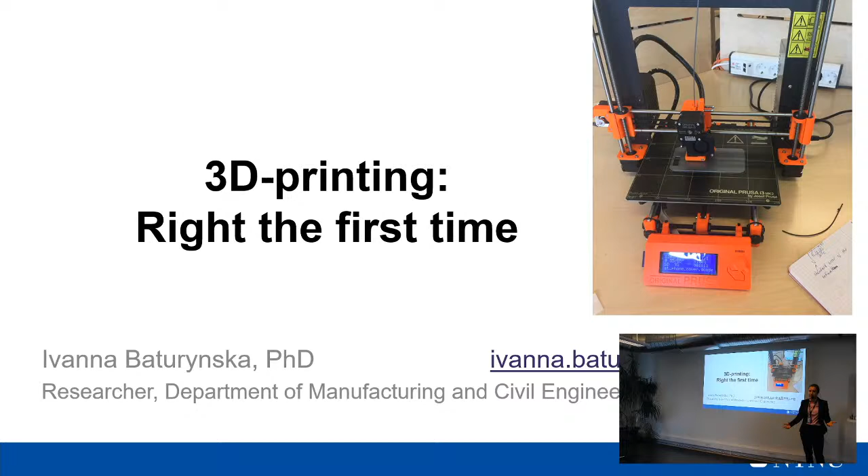I want to add a bit more on my background. I actually come from Ukraine. I moved to Norway 7 years ago to start my master's study in sustainable manufacturing, and after that I went for a PhD at the same department and continued working there. In Ukraine, I also finished my master's in computer integrated manufacturing, and I have my bachelor's in automation and computer integrated technologies. So all this mix comes together in the solutions that I'm developing.

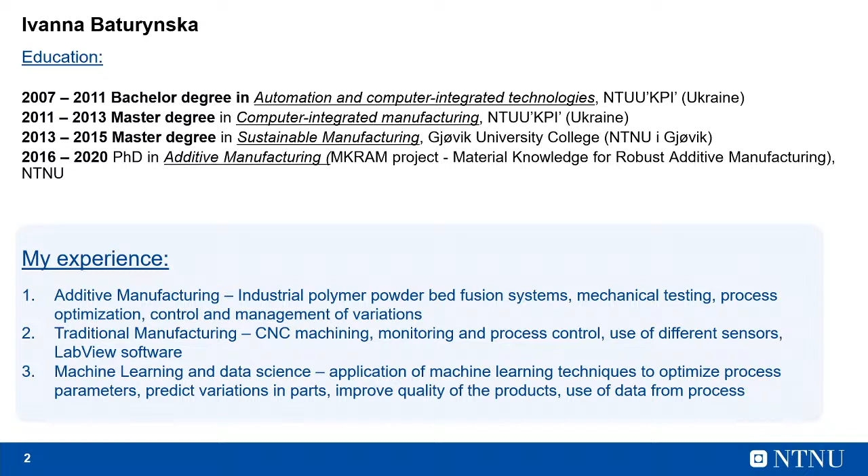So I work not only on additive manufacturing, but I'm also interested in traditional manufacturing, and my focus is on data analysis, machine learning, and similar topics.

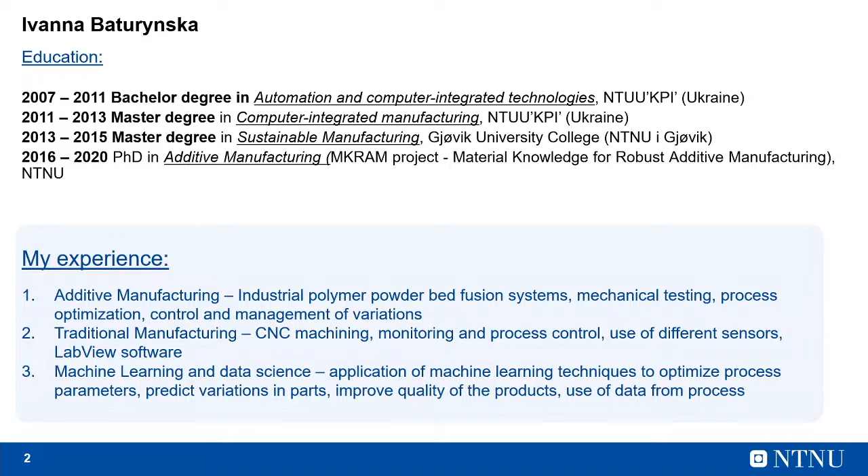But today we will look at a bit of a different side. Today we will talk about what 3D printing is in simple words. How do we define quality? Because you will see that every single person can have their own opinion on what is good quality and what is bad quality. Which factors affect the quality of 3D printed parts? And are there any design rules? Should we follow some rules to get good parts?

I will also show you some examples of the printing settings, how we can manipulate them and how they will affect your result. And then we'll move slowly to industrial additive manufacturing, and show you the difference between desktop 3D printers and industrial machines. I will also tell you a bit more on the current research, so what we do in our department and our laboratories in Gjøvik.

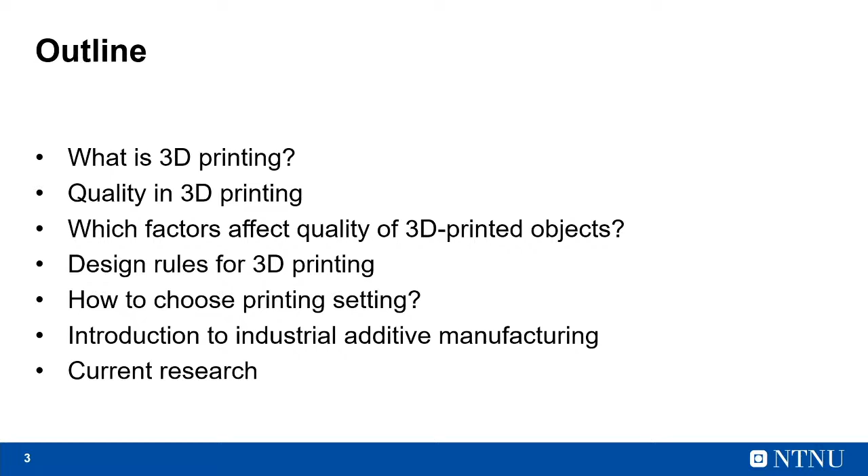So what is 3D printing? 3D printing is a technology that allows us to produce 3D objects by joining material layer by layer. And to do that, we need to have a 3D CAD model available to produce the parts.

So now you can see a small video of how a desktop 3D printer actually works - we have more than 60 of them in our lab. And then in the picture you can see how, using this technology, we printed a soft toy of a pug, a mops, in different dimensions and different colors. So this is fun stuff.

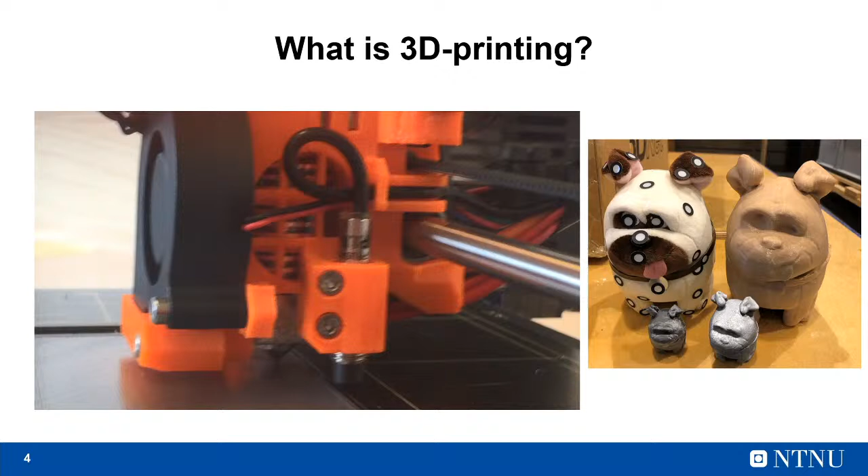But actually, what are the main components of 3D printing and additive manufacturing in general? In general, we can say that we have three main components. The first one is the CAD model that we design.

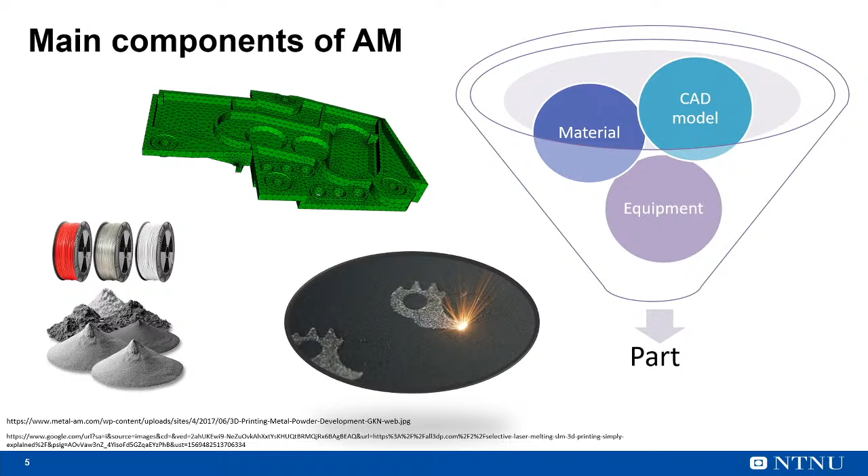The second factor is material, depending on the technology we use. The third is equipment, the machine itself, everything that brings energy to melt the material. It's very important to understand these three different parts, because each contributes positive and negative effects on the production of the parts. We also need to know their synergy, how to control and change some of them, and I will show you later about that.

If we talk about CAD, especially those who know how to draw on paper, maybe at least once in your life you've drawn on paper. But when we talk about the CAD model that we use for 3D printing, it's not 2D like you draw on paper, it's a 3D image.

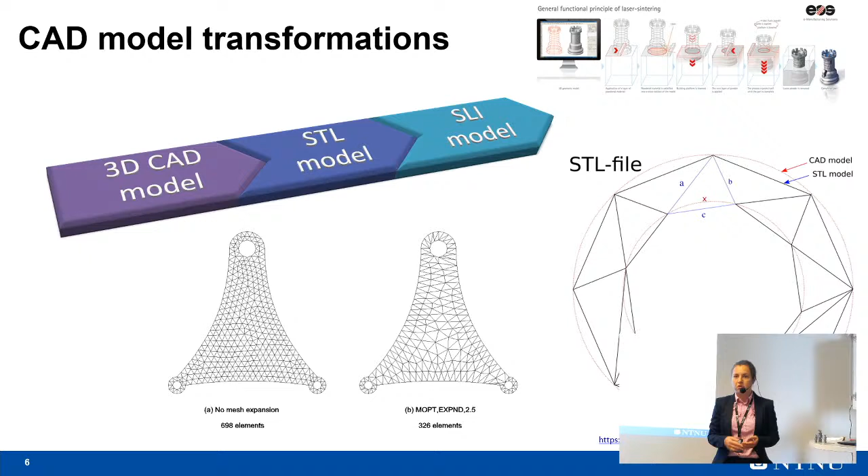Typically for those we use special drawing software, which can be SolidWorks, Autodesk, and so on, depending on the country and accessibility.

But in reality, we don't just take a 3D CAD model and print it right away. We do some manipulations. First, we save it in a special format, which is an STL file. The STL file transforms the 3D model from a solid 3D shape to a 3D surface-based shape, so then we have triangles, as you can see on the picture, that help us describe this surface.

These triangles allow us to slice the object. So if, for example, we have an object, in order to print it as it is, we need to slice it into 2D slices, and then each slice is printed out one by one. This is what you saw in the first video.

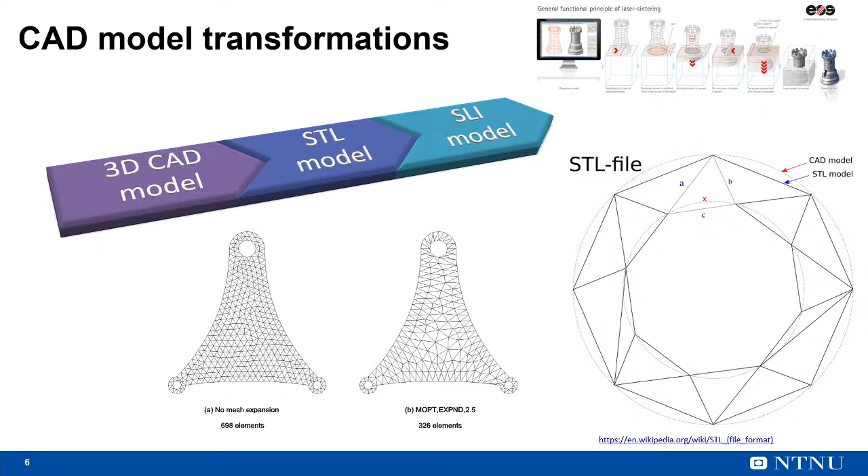But then the question is, okay, we understand that we have a process, we have material, and so on, a lot of choice. But what is quality? Before talking about how to set parameters or how to evaluate and improve them, we need to define quality. What is quality to you?

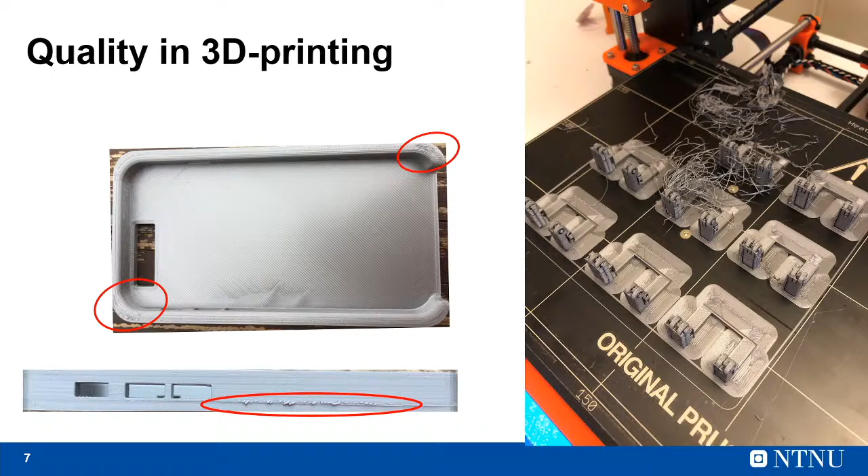Or maybe if we talk about a printed object - I don't know if it's good on the screen, but you can see here the surface is not as good. Is that bad quality? What do we call bad quality? What is the definition?

For us humans, the definition of bad quality in daily life could be that it doesn't look nice, it doesn't function as it's supposed to. But in industry, we have a much more complicated definition of quality. There, quite often, we focus on the dimensions, and small deviations are extremely important. But in everyday life, who cares if you print a minion and it's a bit smaller or larger? No one cares.

You want it to look nice, right? So then you will focus on a bit different settings, and you will have a bit different problem to solve.

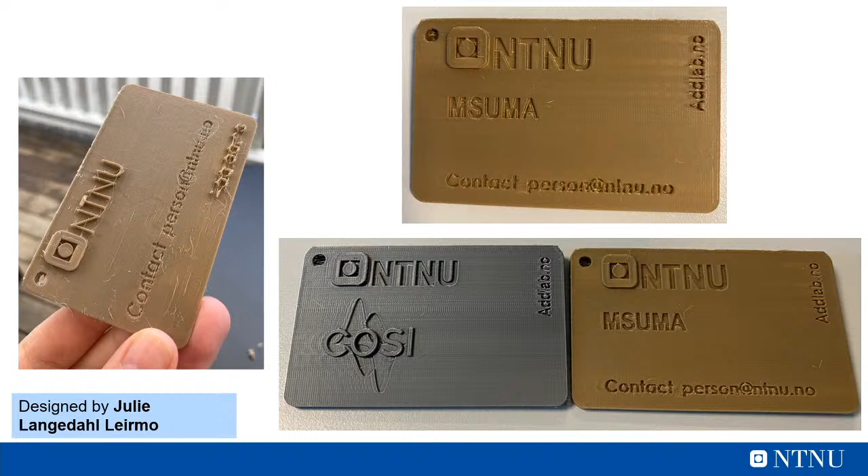So when we talk about quality, I will tell you slightly what can affect it. We can think about rain - yesterday it was a rainy day in Gjøvik. Does it affect if I set a print on a rainy day? Is it going to affect my quality? Or is it okay if it's outdoors, it's raining, and I just set the print? Or maybe should we choose a sunny day to do that? Have you thought of that?

I can tell you for sure, in research we already observed, and in practice we observed, that on rainy days we actually have much worse quality than on sunny days, especially regarding the surface. When you have these stripes of material, white ones coming out of the surface, we quite often get many of them when it's raining outside - even though we do printing inside the house or inside the lab, we still have these issues.

And then when it's a sunny day, we use the same CAD model, the same printing settings, the same printer that stays in the same room, but the surface is perfect. So it means that it actually affects the result. We need to take care of that, right?

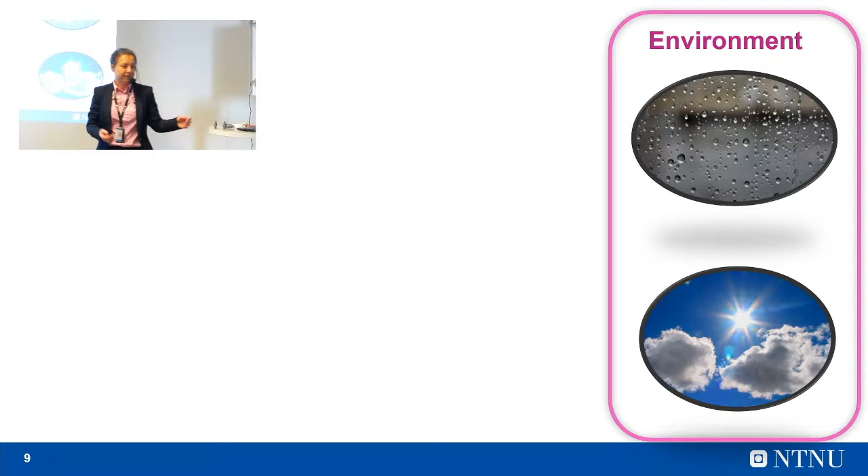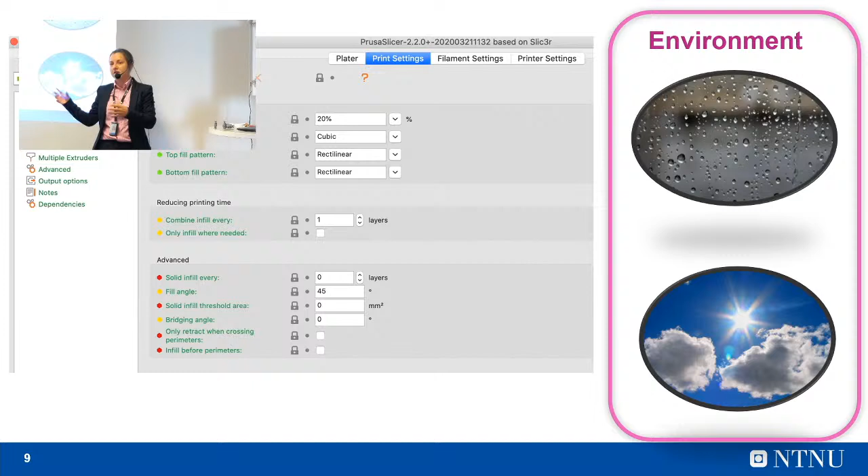But is that the only thing that affects quality? Most probably no. As I said, the way we set our printer, the parameters we choose, in combination with the CAD model and material, can also lead to many problems, issues, and bad quality in the result.

In some cases it can just burn the material, and you'll have a lot of burnt pieces on the object, just because you used a temperature that was too high. That's all. If the printer bed is too cold, most probably you will never finish the print because it will just curl up, not stay fixed on the printer, and on some moves it will just continue going and following the printer head, like dancing on the table. So you can turn on the music and just have it there. You don't want that, right? So you need to be aware of this.

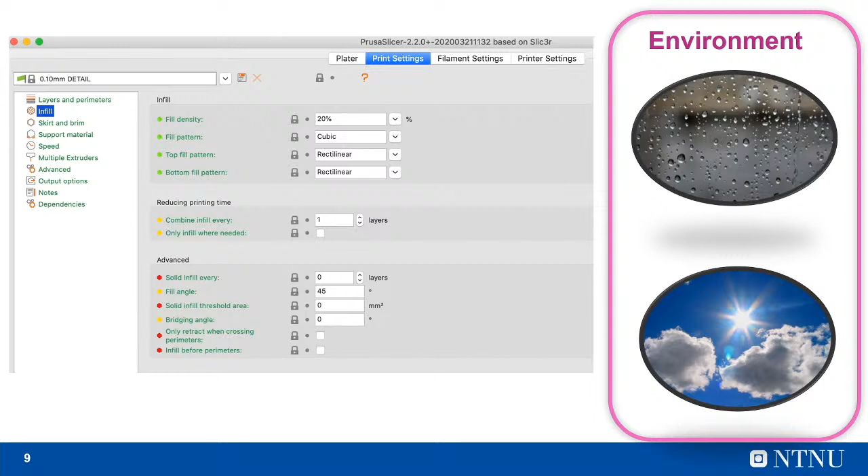Material choice - yes, which material? Who produced the material? Is the material inside this roll a good one? Or maybe there are some empty spaces that will lead to empty spaces in your part. Can you check it? Most probably no, but industry will check it, so they try to make sure they use correct material.

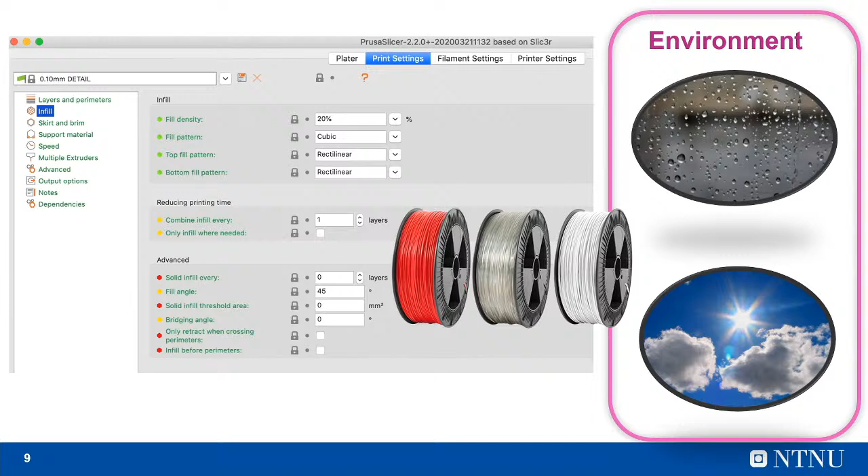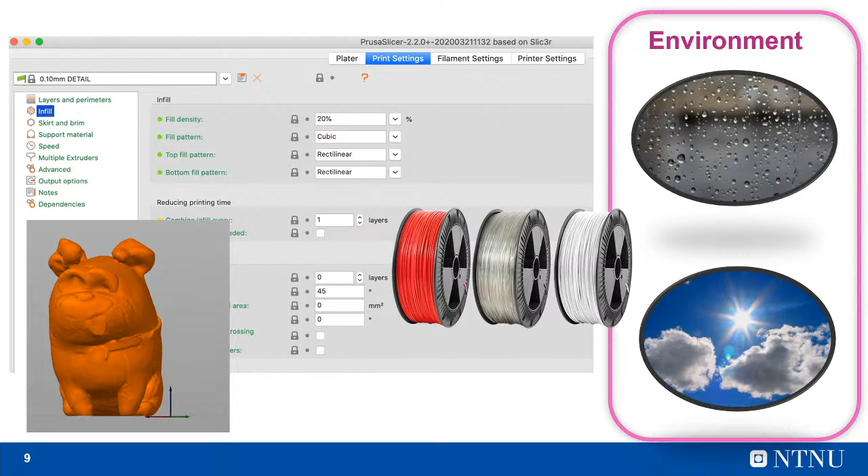And then the CAD model itself - how do we design the part? We have rules that we need to follow, or at least be aware of, so that when we put all these things together, we know how to manipulate them. So the CAD model is also important in all of this.

So can we say that we have some factors that are controllable to us humans, and some factors that are uncontrollable? For example, a rainy day - can you control it? No. If you're in a lab, of course, you can buy equipment to control humidity level, temperature, and so on. But in real daily life at home, no, I don't think so. You're not gonna do that, right?

So maybe sometimes if we know we're producing something critical, some design piece we want to keep in the living room when guests come, and we want it to look good, maybe we think about printing it at times when it's not as rainy, just to be aware of what can happen.

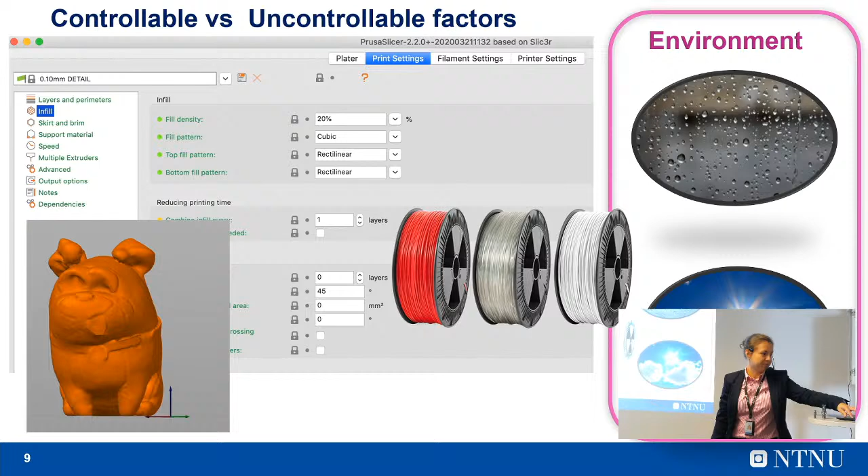But process parameters and the CAD model - this is what we'll actually talk about, because this is what we can control. So here's an example, it's a bit different from what we have in the lab, but still.

You can think of two parts of additive manufacturing: the one for home use, desktop 3D printers, and then industrial machines. They are larger than me standing here, so they stay in special rooms, and it could also involve robots, as in the picture, just showing the difference in complexity between home user printers and industrial ones.

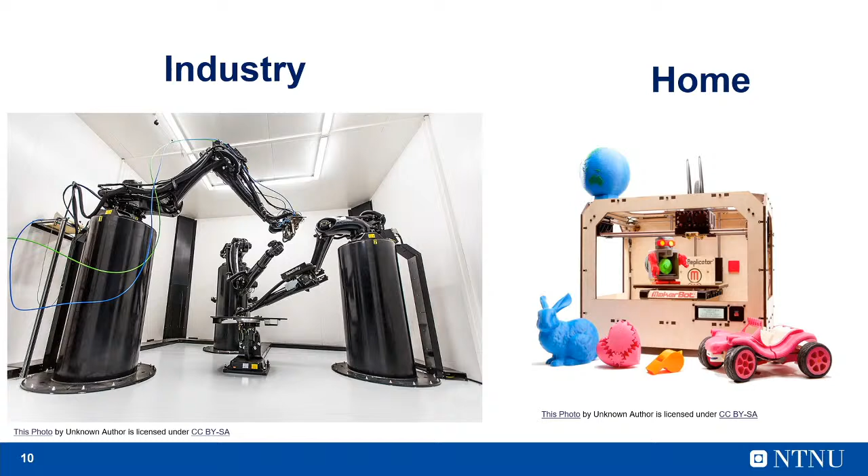Now we'll talk a bit about design rules that are actually available online, so you can find them. There are many different websites that give this information, and some of them I will question, and show you why. Not always can we fully trust everything on the internet, and I will show you why - but these rules do work.

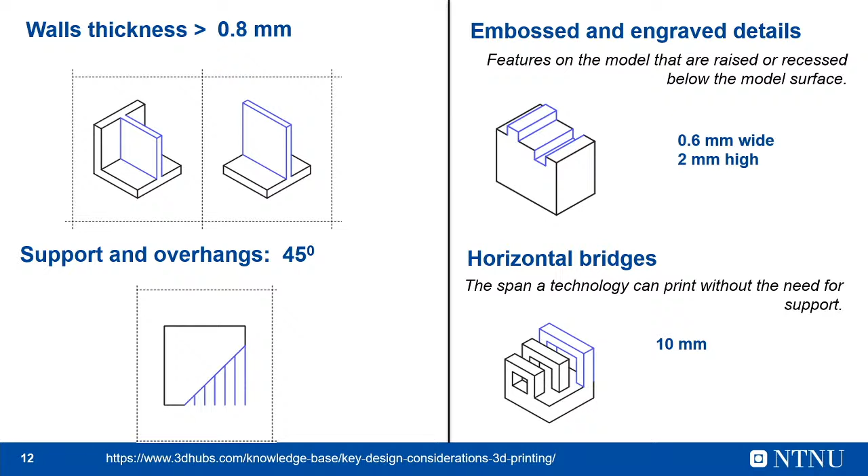For example, we know that when we design some part, if you imagine a wall like that, this thickness needs to be more than 0.8 millimeters. If you try to do less, you will never print it, because the printer needs to go at least 2 layers together to make a wall. Because the printer nozzle usually has a 0.4 millimeter diameter of melted material flowing down, if you set your wall to 0.7 millimeters, you're not able to do 2 runs together, so you don't have anything to melt together. Then you have only 1 line, and if you just try to go line after line, it doesn't provide any structure at all - you cannot make it.

So it's quite an okay rule, we can agree on that. We also know that if we want a design feature that goes up to 45 degrees, we don't need a support structure, so we can build it as is. This is important to know, because the surface will be much better, and I will show you examples of what it means to not have as good a surface.

Another rule is about embossed and engraved details. There are limitations on where we need to start, in terms of width and height. It's 0.6 millimeter and 2 millimeters.

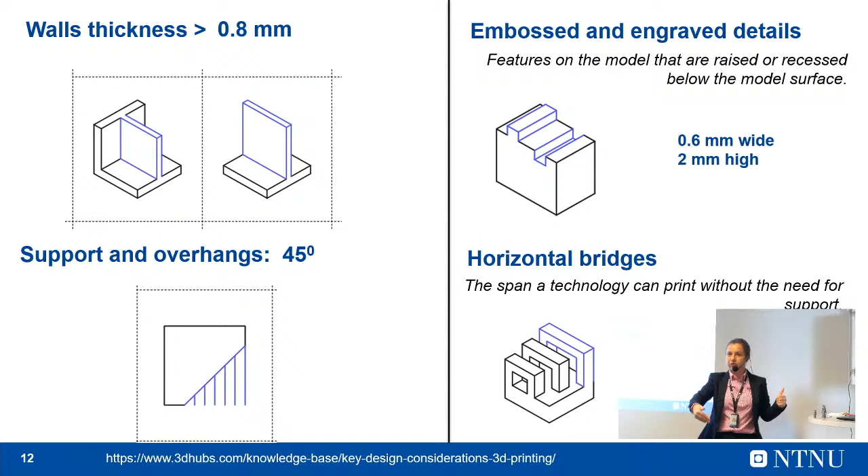Horizontal bridges need to start from 10 millimeters. We also have a size of holes that needs to be larger than 2 millimeters, otherwise it will just be a solid piece of part. You will not be able to have a hole.

If you want a part that is one piece with a movable part, this is actually a great possibility of additive manufacturing. You can produce something like that in 3D printing. But you need to make sure the distance between two connecting parts is at least 0.5 millimeters, or a bit larger, because otherwise they will just melt together. If you have less distance, it will just become a solid part and not a movable one.

Then pin diameter follows the same rule as walls, it needs to be larger than 3 millimeters, otherwise it won't be able to hold the structure as a piece, and some other features as well.

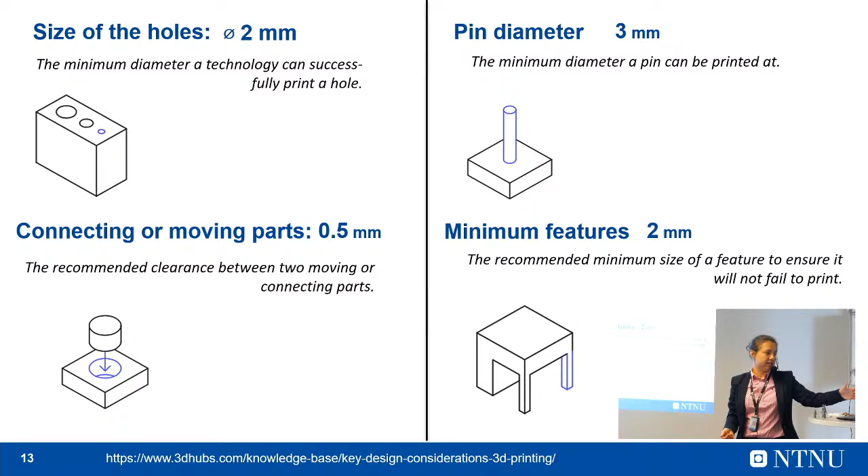So as you can see, there are many design rules. They sound like something, oh my gosh, it's so hard. But in reality, if you like to design and you just play around with it, it's not that hard. You need to try and work on it a bit more.

But let's talk about build orientations, because this is something we can do even if we don't control the CAD model. So if, for example, we go to a web page, as I did, because personally I hate to draw, so I don't use CAD, you can download many different CAD models that are available on free websites.

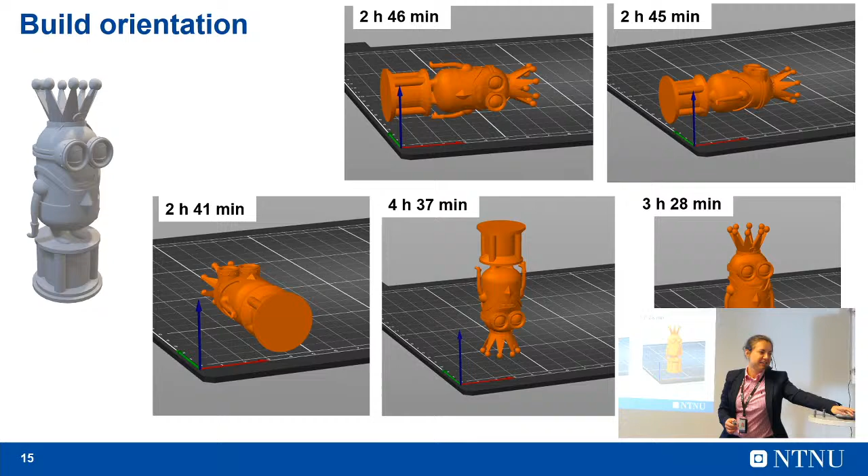But then an interesting fact, when we turned it like that, it's going to take 3 hours and 28 minutes. Is there such a huge difference? Why does this happen, why does time change so much? The reason is because when we produce it in different orientations, we use support structures that allow us to make the parts we want. Depending on the orientation I picked, you have a different number of support structures required to produce this part. And then the question is, can we say who is the winner?

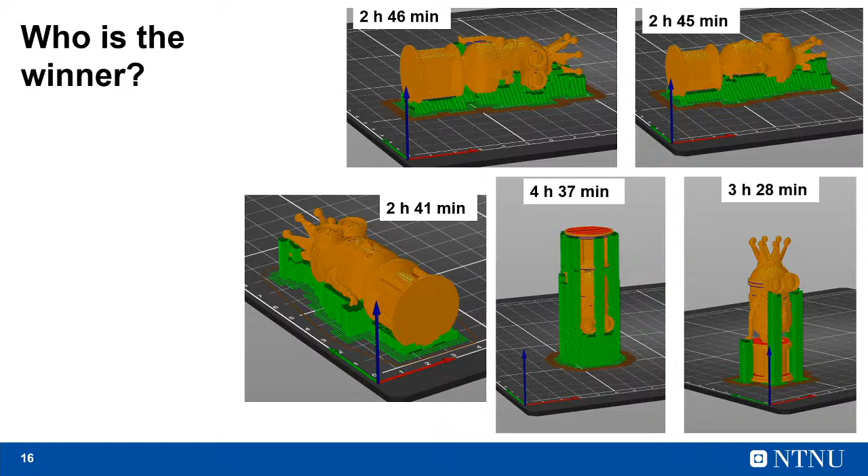Can you choose for yourself which one you should go for? If you use just time as the main requirement, probably you'd go for that one. It takes the least hours to make, probably, maybe not.

But another question is, can we produce it with or without support? What's gonna happen? Quite often, the main task is to find the orientation that gets as few supports as possible. But it's not always so easy to see.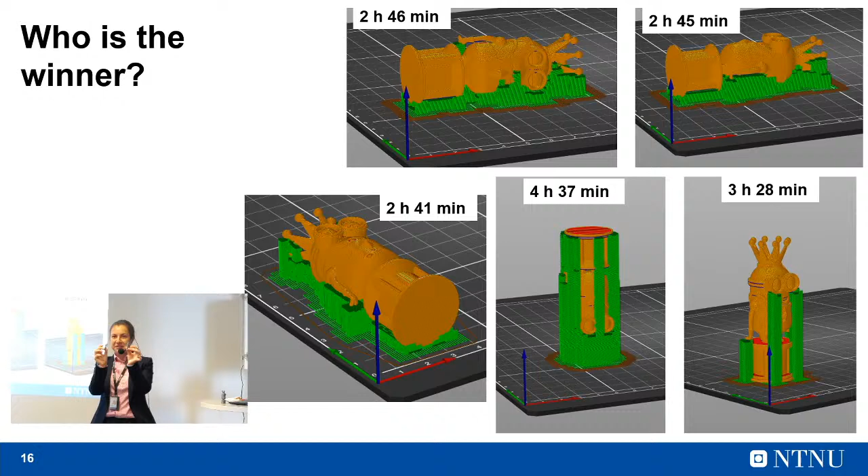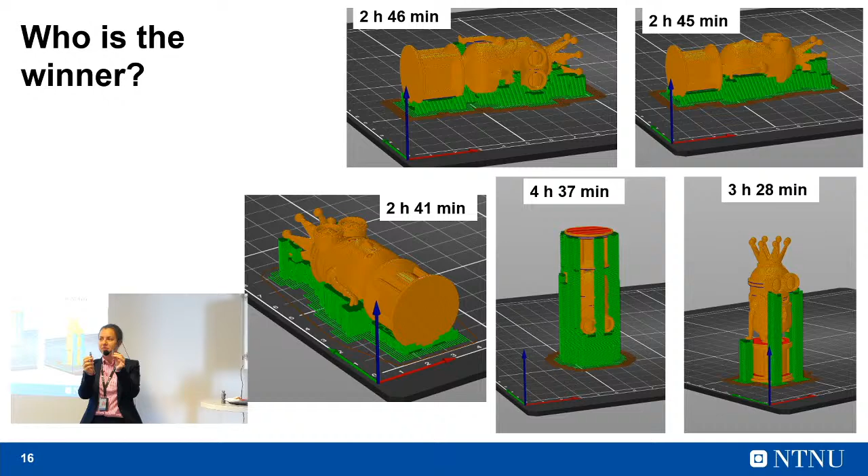So yesterday at home I made smaller versions of the same minion, the chess minion. It takes 1 hour 12 minutes and 1 hour 22 minutes to make them, and I wanted to test how support versus without support is gonna affect it. So maybe this will help you a bit.

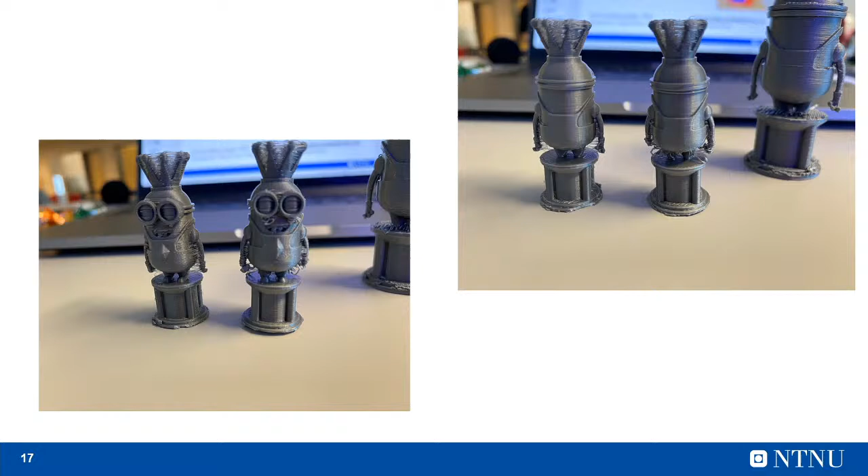You can see on the picture, this minion on the left side is with the required support, and on the right it's without support. I was like, I don't care about the rules, I just want to see what happens. If it doesn't print, then it doesn't print.

But actually there is a small difference. Without support, we got a small curling in the hands of the minion because it was hard for the material without support to stay in place. That's why it moved a bit, but the following layers actually used this curling as a support and then continued going okay.

So when you know the design rules, I was expecting this, I knew it was gonna happen. But I also saw that the crown follows this 45-degree rule, so that's why I went without support as well.

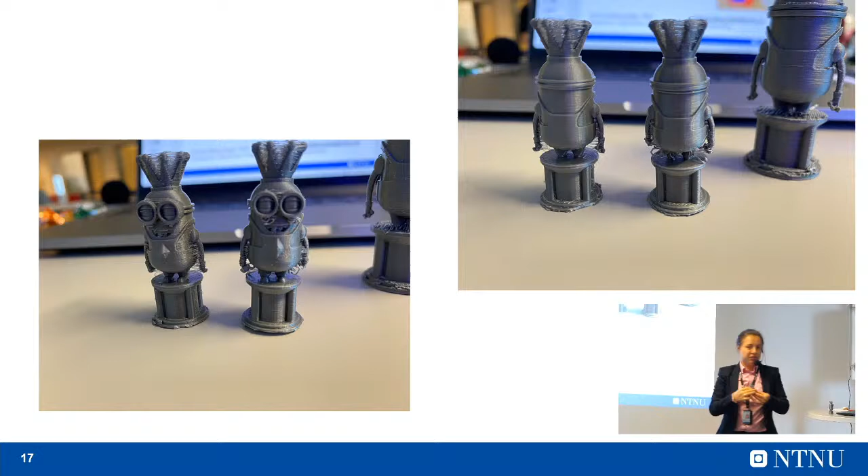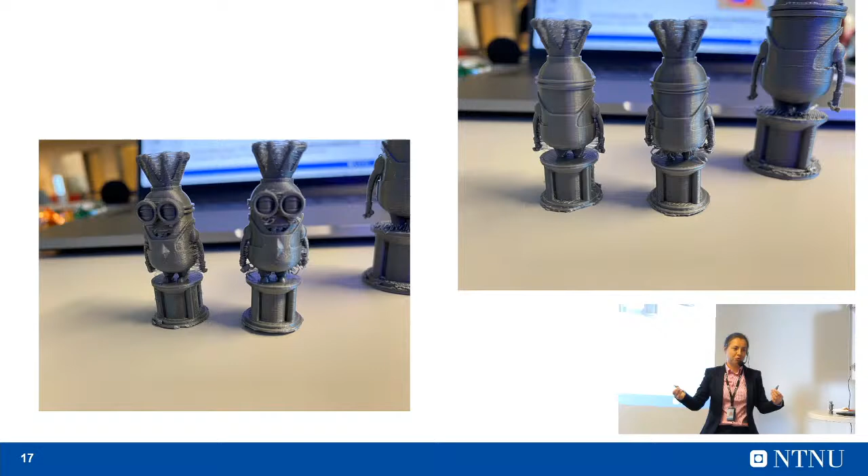So this is a small way to test if you know that the CAD model follows design rules, then you don't use support. But if you don't know that, what do you do then?

Then we talk about process parameters that can also help us, and support is part of that. Not only support affects the time, but there's also something called infill rate. What does infill rate mean? It's kind of the connection of the walls inside the minion, in our case.

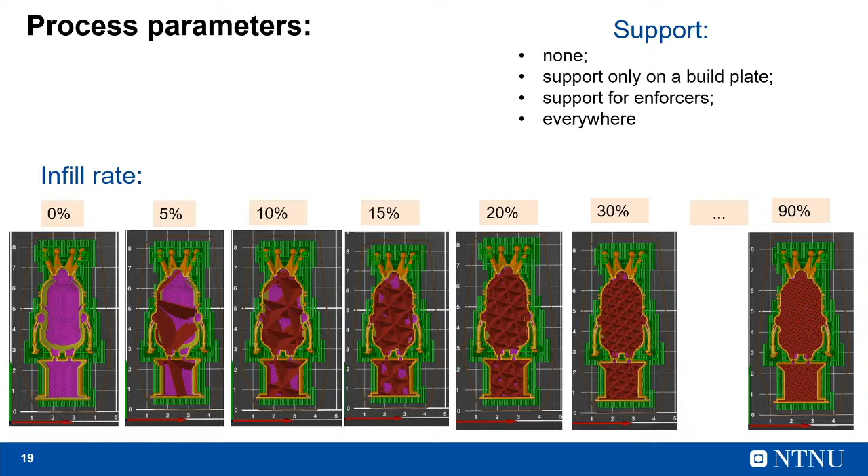So I made pictures from the software, using the same layer just to show how it differs when we change the infill rate. In the first case, I say I don't have any infill material inside, so I just want to have the contour printed, and that's all.

So it will be light, and I'm not gonna press it or damage it. That's why. But what if we use 5%? Then we have this small triangle that appears.

Actually these minions are printed with 5% infill rate. They are light, and afterwards we'll put them next to the cleaning wipe, so those of you here in person can look at them.

Then we move to 10%. You can see it's a bit more material that comes inside. And then when we increase the infill rate — I didn't show 100% because 100% means it's just a solid part.

It's gonna be heavy because material has weight, and it takes a lot of time. Each of these lines — you need to understand the printer needs to go through each of these lines at each layer. This is what affects our printing time a lot as well.

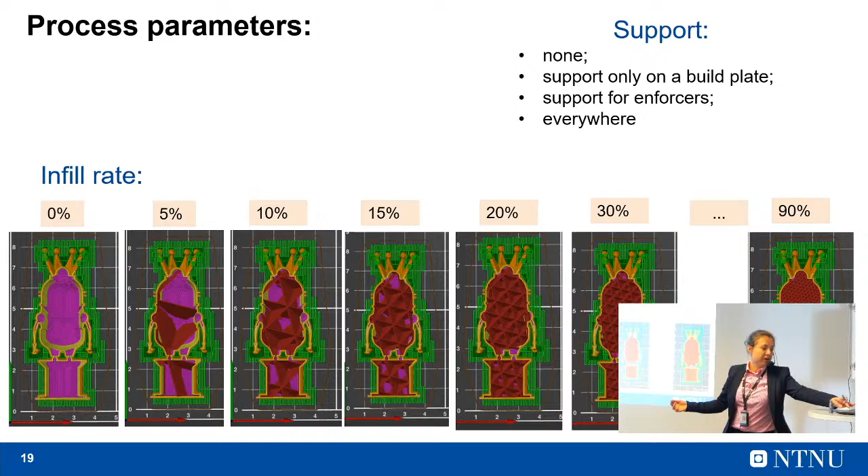So you can see this process. And then the support I told you about, there are actually 4 different options we can choose from. The first one is non-support. I told you one of these minions was printed like that.

Then we have a second one, support only on the build plate. This one, another minion, was printed with this option. Then we have a third option, support for enforcers.

It means that you push it yourself. If you're an expert, you can decide in which regions you want to push support. But in reality, if you don't do this, it's gonna work the same way as non-support. So if you're not an expert and you just click on that without setting the rules, it's not gonna work — it will behave as non-support.

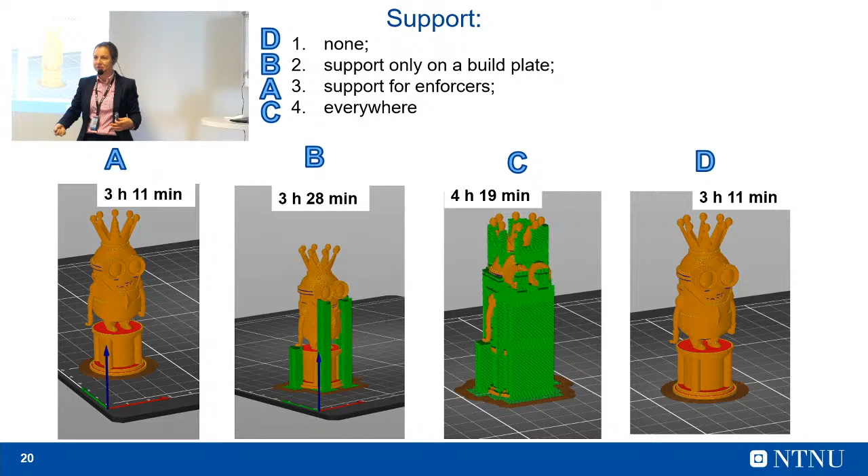But then there's also another issue: dimensions and tolerances, as I said in the beginning. This is a very special topic for me because I work with it a lot. This is my key thing, what I'm looking for all the time. That's why I couldn't just pass by desktop 3D printers without checking whether the information told by different people is true or not.

If you Google some websites, you'll find that they say tolerances for desktop 3D printers are quite often plus minus half a millimeter, 0.5 millimeters. The question is, is it a lot? No, for home use, probably not.

But then I decided to question, is it actually a true story? Is it actually this value? Am I sure that if I use a Prusa printer, it's going to produce a part not larger than these values? And in reality, no, it's not correct.

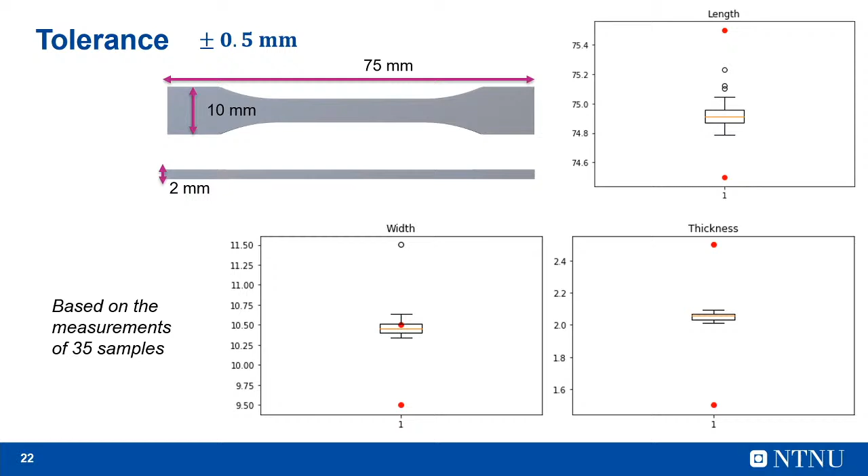Imagine you have a shelf in the kitchen and want to put something in it. You measured it, designed it, 3D printed it, and then try to fit it in and it doesn't go - it doesn't fit, that's all. What should you do then? Of course you'll go change the design and print it again, right? You'll try to measure how much it doesn't fit.

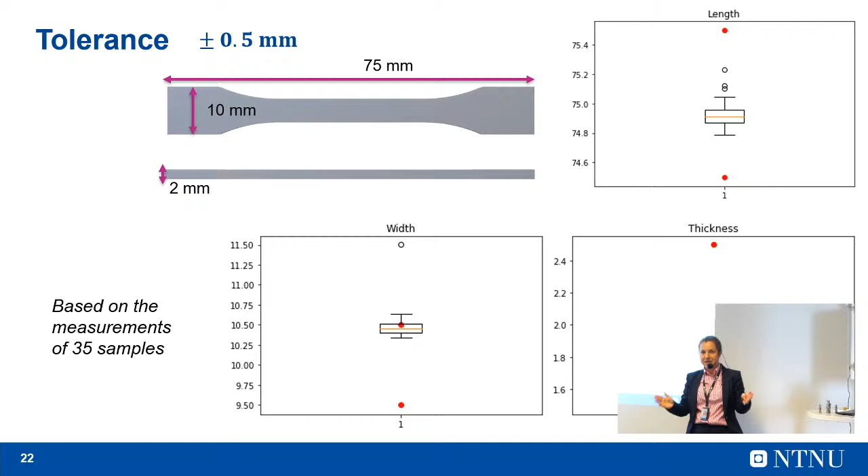But imagine you want to fit something inside a shelf where you want to store some stuff. Then it's more critical, right, these tolerances and dimensions. Then you want to be aware of what the deviation can be.

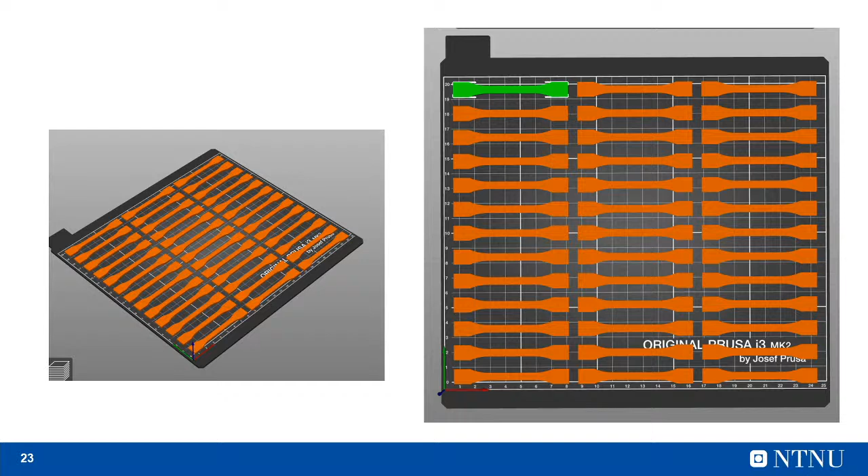And what actually affects this - because we produced all those parts that I analyzed, 35 samples like this, produced in one run. I fitted them on the build plate as you can see on the screen, and I just hit run. How can it be that in one run I produce 35 parts that have different dimensions, that actually have deviation? What does it mean?

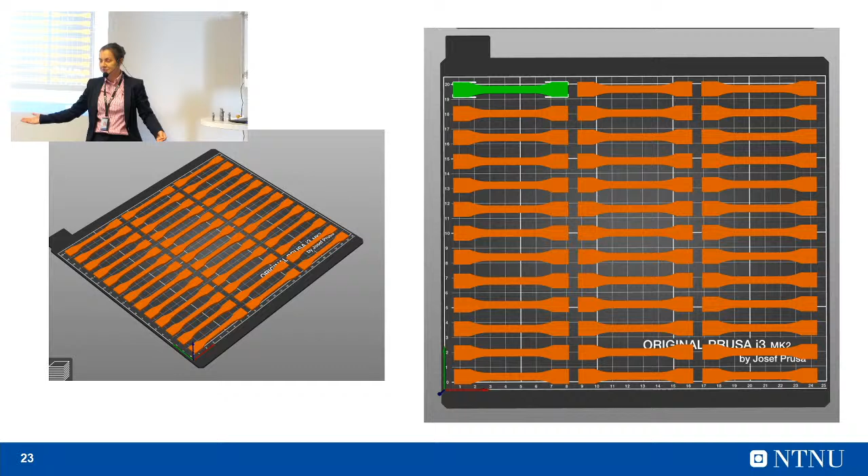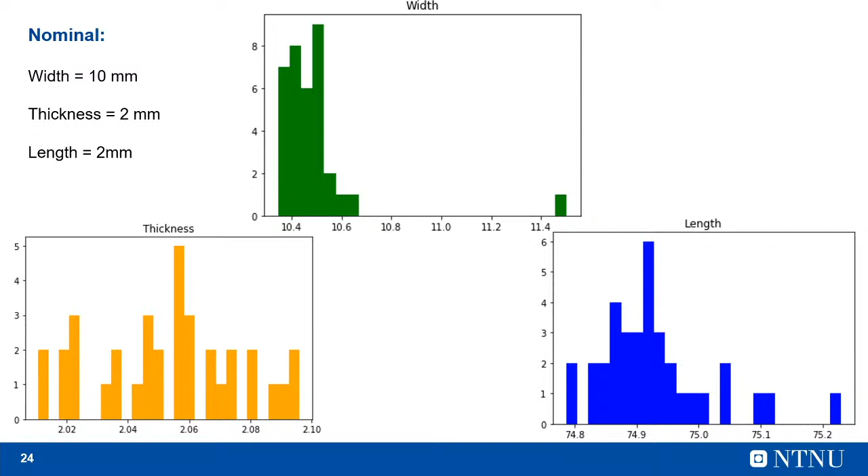And then I decided to help you a bit more and show another representation of the same graphs that you've seen before. So as you can see, our desired value was 10 millimeters for width, but actually we don't hit this 10 millimeters at all. We have all parts with larger widths than we wanted, all of them. Interesting, right? And then thickness.

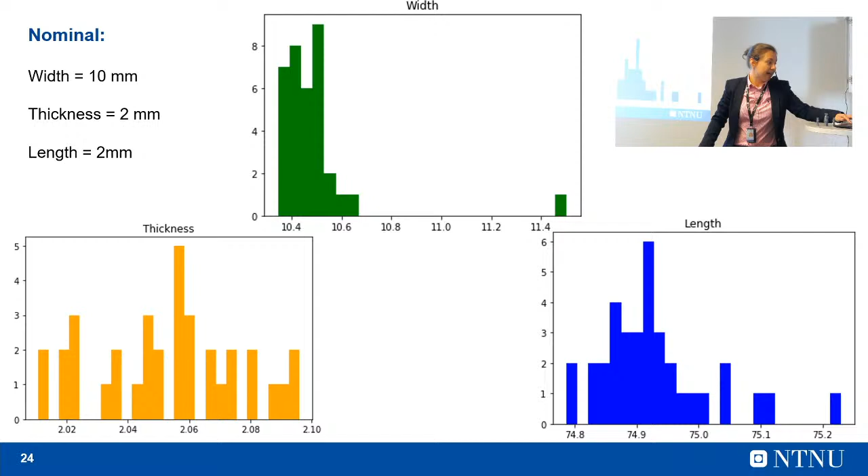Here we can see a huge distribution, a bit here and there. Why does it happen? We produced everything on the same plate, at the same day, at the same time. Strange, right? And then lengths - here we get even smaller than we want parts, or larger.

So the problem is that this material has a special behavior. While we are doing printing, some layers keep being hot, while other layers start to cool down. And then after we are done, the material shrinks a bit, and in some parts it shrinks much more than in others. That's why we have this quite different deviation all over the place.

But then the question is, can you do it at home by yourself? Can you trick this part and decide, okay, this time the deviation will be such, and then later it will be a different one? Most probably no. So this is what I do in my research.

I'm trying to develop algorithms that, hopefully in the future, can be transformed into regular mobile applications that will allow you to scale objects automatically by just telling the software where the object is, which printer it's printed in, which material it uses, and where it's placed on the build plate. So this is what my research was about.

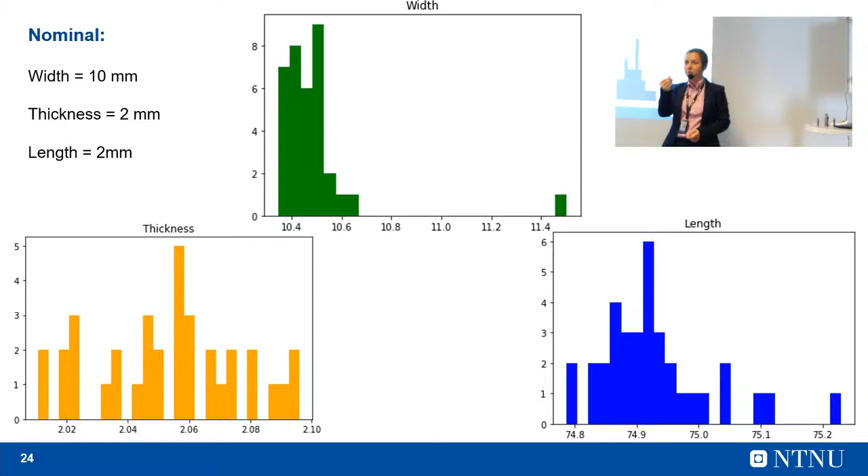Can I scale each object individually when we print more than one? So that's why I said it's not really an academic presentation, but this is actually what I do - this is all my research.

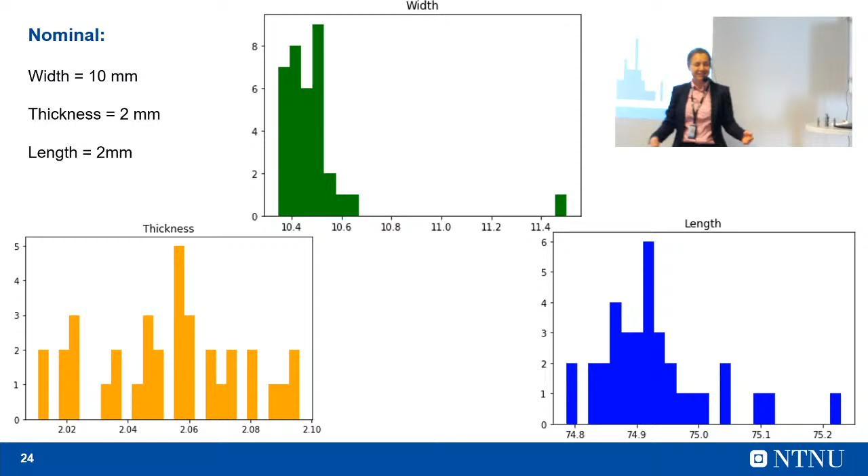At this moment, we have more than only this task. Together with my colleagues in our lab, we are actually working on the development of smart monitoring systems, so hopefully someday you will get this app that will allow you to control and scale parts. On the way, for desktop 3D printers - we also have the same project, but for industrial machines.

And I will show you just on the next slide how these industrial machines look. We also work on algorithms to do a quick dimensional quality inspection based on 3D scanning results.

So imagine this minion - how should you treat dimensions here? Do you have a regular lens? What about the crown? What about the arms? How are you going to measure the quality? How are you going to define that it's a correct one? And imagine you have some industrial part that is inside your car or inside a plane.

Of course it's challenging. So we're trying to develop algorithms in order to use a 3D scanner as an object to provide us models to compare.

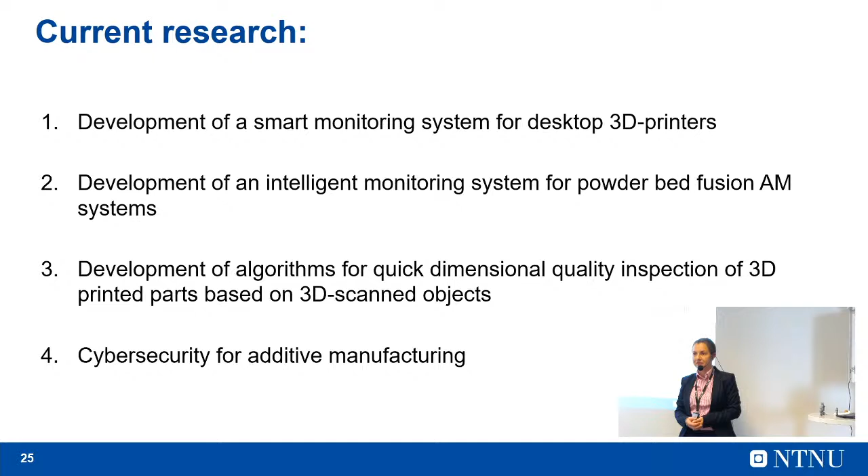And then the last thing - because we've talked a lot now about all these monitoring systems, but that means we are going to use sensors and stuff. That's why we need to take care about cybersecurity issues for additive manufacturing. So if you have an app on your phone or at home on your computer, no one gets to you through that app, or no one changes parameters on your printer through that app.

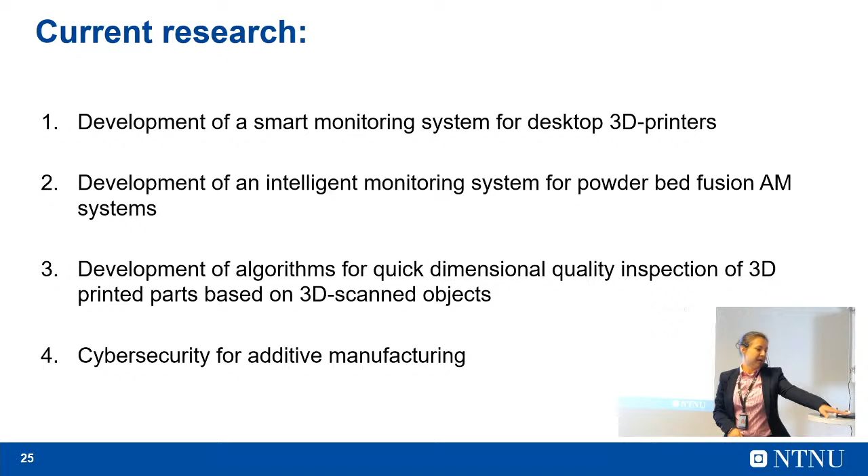But then, as I promised, just to show you which printers we have - industrial printers we have in Avalab - actually we have one metal printer and one polymer-based printer. This polymer powder-based printer, this is my baby. I played with it through all my PhD.

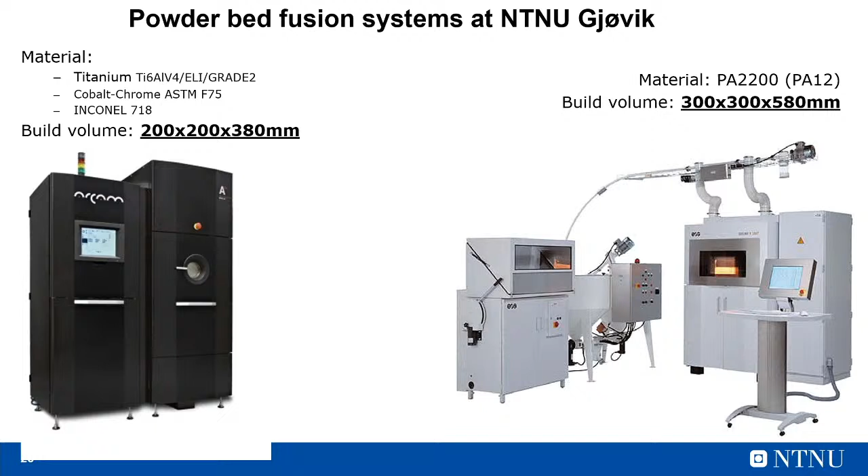So it wasn't the desktop 3D printers that I worked with, it was those machines and the issues connected to them. And when we talk about those machines, the difference is that in a desktop 3D printer, we talk about a build plate which you can kind of consider as a 2D space where you put your object and produce. In a polymer powder bed machine that I was working on, you have a big box in which you make parts, and then you can fit them any way you want.

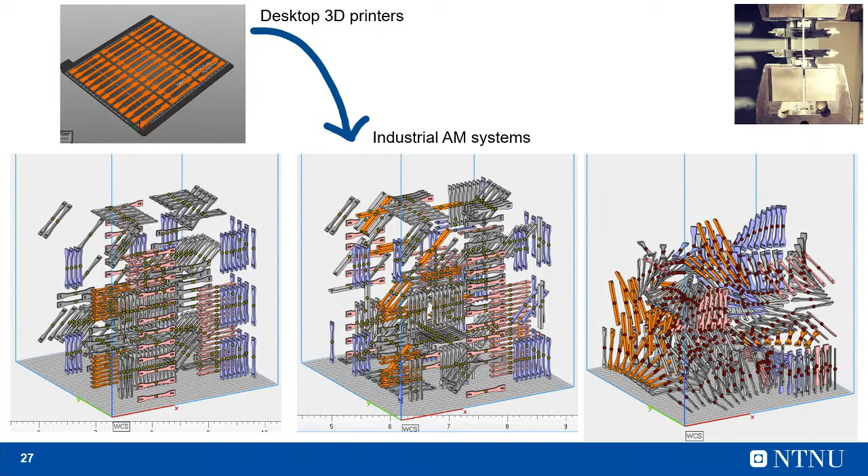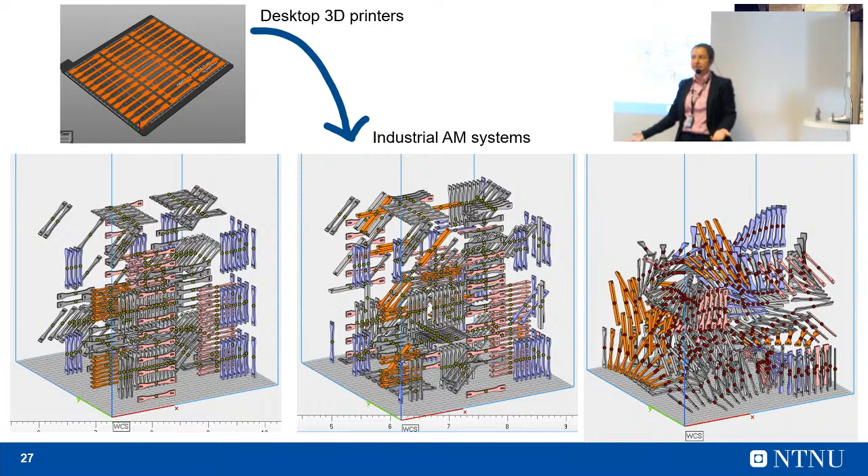It's just you need to make sure that you will get the result you desire in the end. This was my task: if you pack it like that, how actually can you get each part at the same desired value as we designed them. Another difference is that in desktop 3D printers we use polymer filament, but in powder bed machines we use powder as a material.

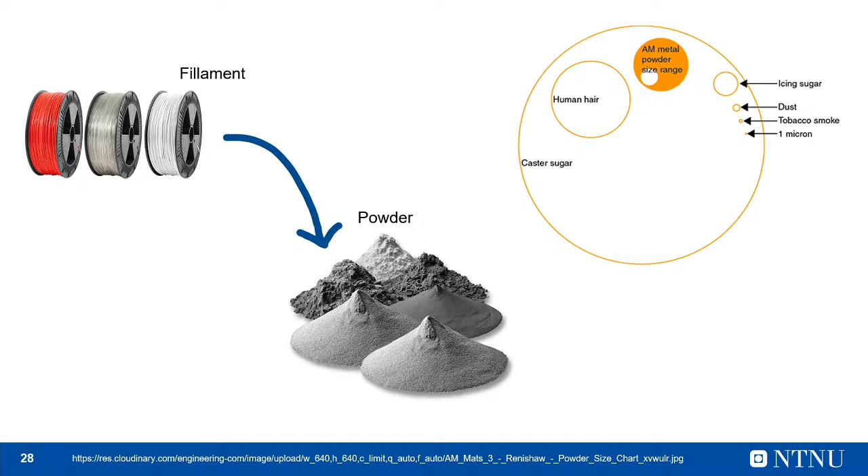Just for your comparison about the powder, you can see on the screen this large yellow circle, which corresponds to the caster sugar you have at home, the kind you use if you drink coffee or tea with sugar. Then you have a human hair at microscope size, and the powder material we work with is even smaller than our human hair, just so you can imagine what we're talking about when we talk about material.

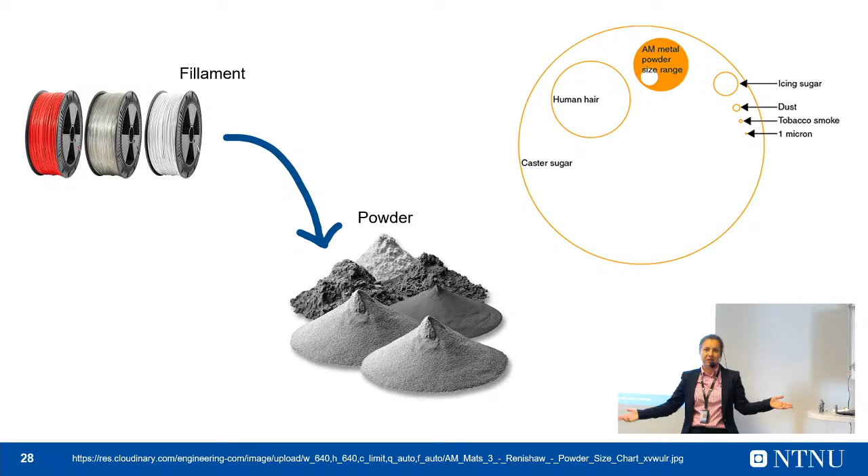So this is a small introduction to my world, and I hope it encourages you to get to know 3D printers better, and to know that you can use our printers in the lab. You can go through the course, and it's open for everyone at NTNU, not only Gjøvik. Thank you very much.

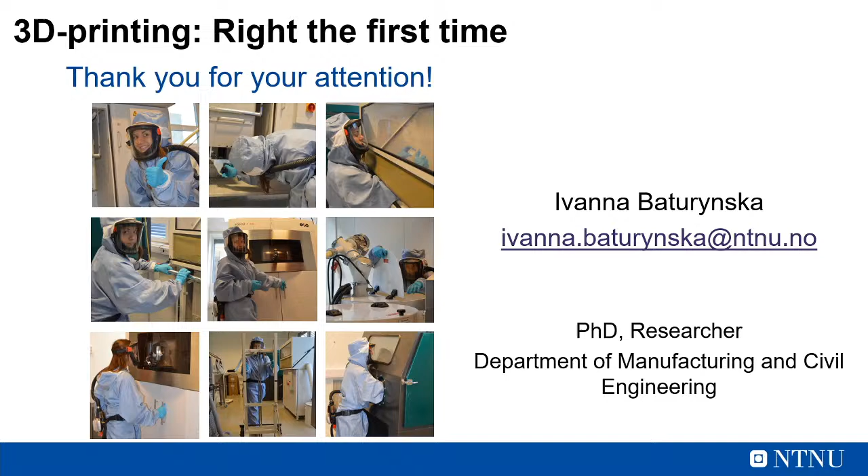I brought my laptop because we have some comments and questions, and not surprisingly the interaction design people are very interested in this. I'd like to bring you a question from a colleague of ours from the Department of Design, Kjell-Are Refsvik. He asks: could you suggest a low-threshold CAD/CAM model software for non-engineering students who want to get started in 3D printing? And could a web-based software work here?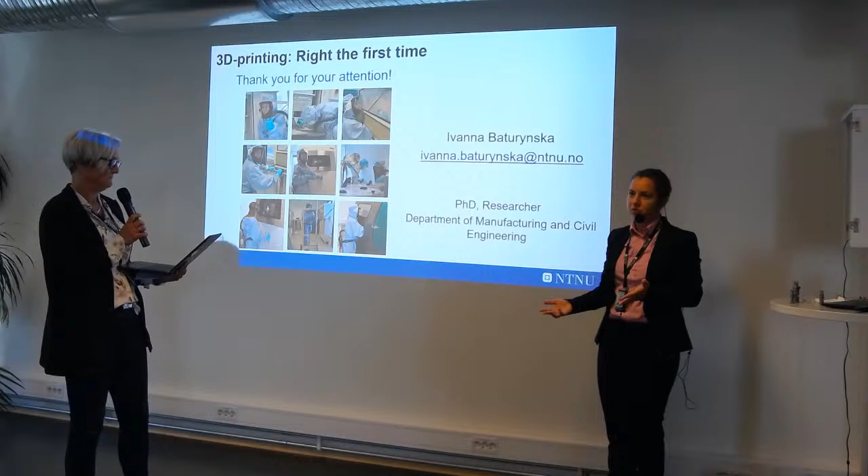I just tested it. Autodesk has a web-based solution called Tinkercad, tinkercad.com. You can go there and design a CAD model in a very simple way, as a starting point where you operate with 3D objects and then add on other 3D shapes. After you've designed your model, you extract it as an STL file, or if that's not possible, a STEP file. Online you can also find free converters from STEP to STL, and then you use printer software to slice it and print it. So it's like you don't invest any money at all - everything is free of charge.

Thank you, I hope that was an answer for you, Kjell-Are. He also says it's a very interesting run-through for 3D printing, and for me it was a crash course, very nice. In Norwegian we just launched a net-based, online course for 3D printing, but it's in Norwegian. Now we're having an agreement with the lab to provide at least some personal course here in English, and in the future we'll develop a similar online course for 3D printing in English, especially for those present in Gjøvik. It will be quite easy - you go through the course, it takes a couple of hours, maybe a week max, and then you can use our printers in the lab. For those not in Gjøvik, contact me and we can talk.

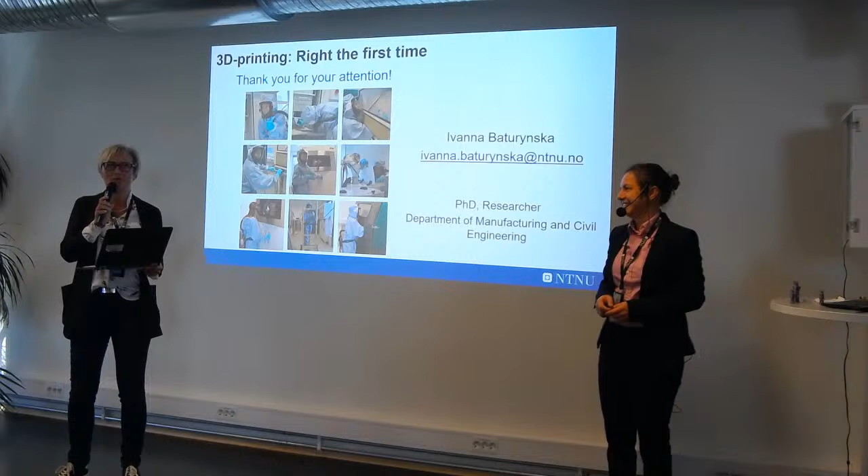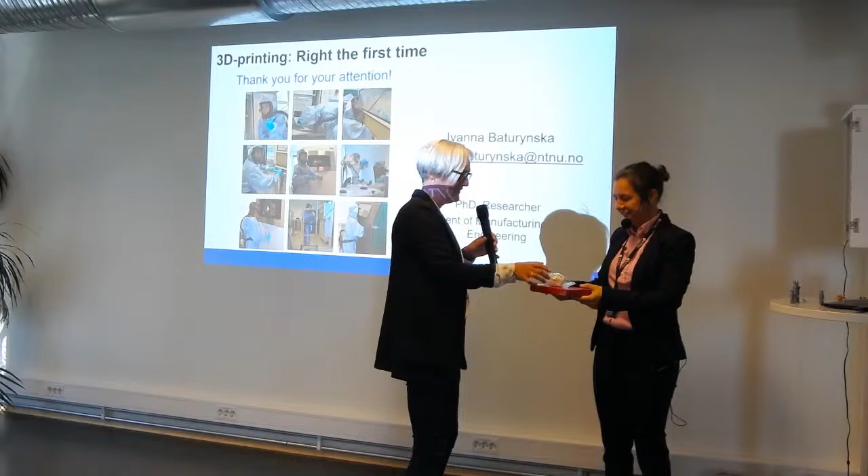Just a second - thank you very much for inviting me. Thank you very much, oh thank you. Good luck, this is the brain. So thanks to you all, bye, thank you.